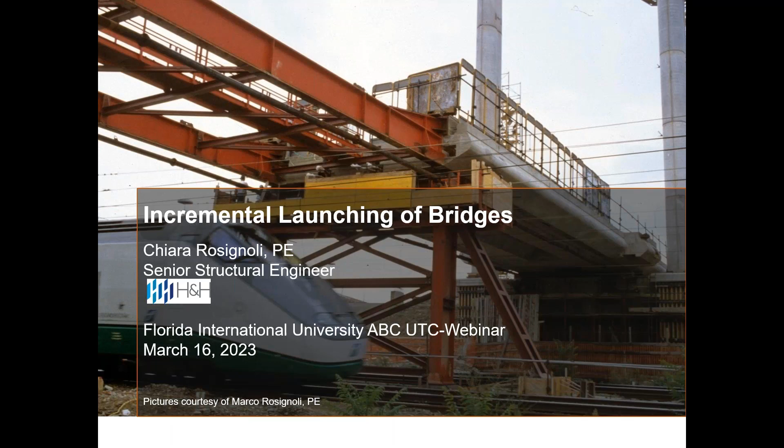Today we will talk about incremental launching of bridges. We will discuss what this construction technique is. We will focus on incremental launching of cast-in-place concrete bridges. We will then compare this construction technique with other construction techniques suitable for similar span lengths. We will take a look at some limitations of the application of incremental launching, and then some examples of application, including some very unique bridges.

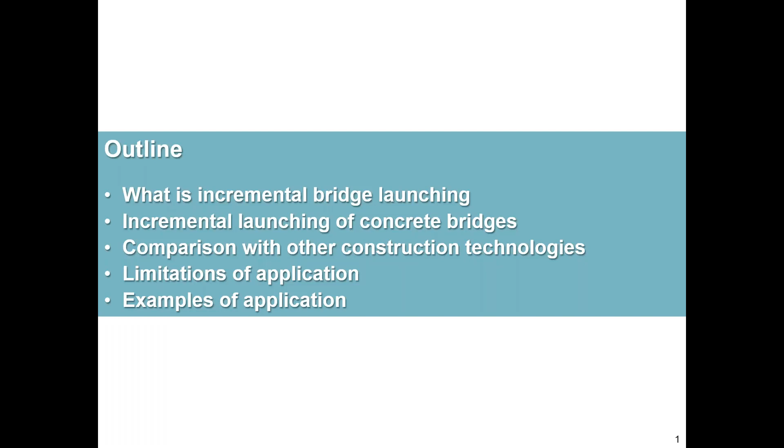Incremental launching was born in Europe in the 60s, but it became way more popular with the advancement in knowledge of materials. Especially the introduction of Teflon was a game changer for this construction technique, because it ended up replacing elements that were greased with motor oil, making sliding bridges way easier. This construction technique is now widely used all over the world, including in the US. Two memorable bridges: for steel bridges, the approach span of the new New York bridge, with some very interesting videos online of this launch; and for post-tensioned concrete bridges, the Belleair Causeway, built in Florida.

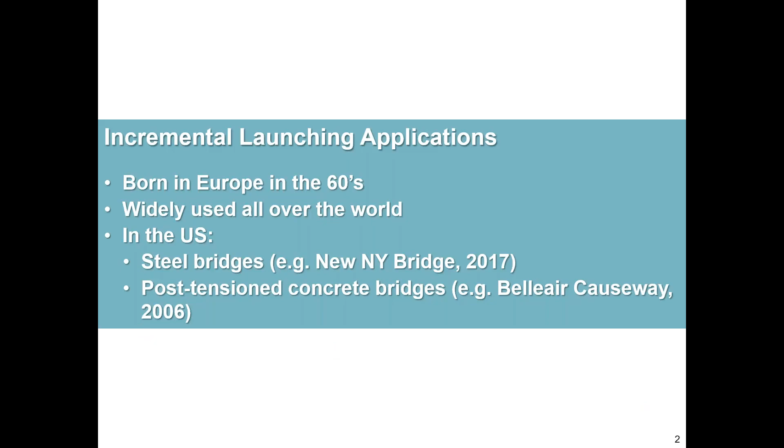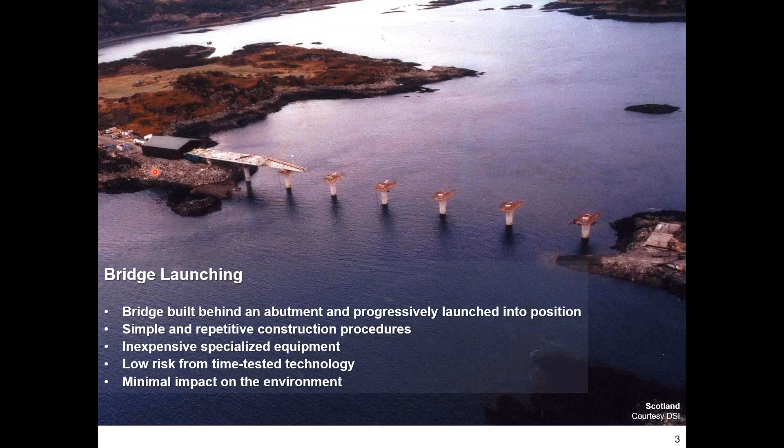So we're looking at a launching nose. Here you can have a better idea of how it's made. It's, as we said, basically two beams attaching the front part of our bridge that are braced together.

We saw before the bridge is built in a fixed facility, so it is sheltered from the elements, but at the same time the area around the construction area is sheltered, so it is environmentally friendlier than other construction techniques. With this construction technique it's usually easy to use local labor and material in support of the local economy, because even if the local crew may not have long experience with this technique, it is very repetitive, so the learning curve is fairly quick.

Now you're looking at a beautiful bridge that was built in Scotland in 2008. For this bridge, the environmental impact was a major concern during construction, since it was built in an estuary, and that is one of the reasons why incremental launching was chosen as a construction method. You can see there's no impact on the estuary.

For this bridge there was another big concern: this area is in the migration path of some bird species, and there was environmental concern about not disrupting this process. That's why they wrapped in green fabric all the areas where the workers were passing by.

Incremental launching does have a minimal impact on active infrastructure. You can see down here, this bridge was launched over 11 active railway lines, and it was constructed in this area in 3 sections.

It was then pushed in 3 pushes, so there was no active work over traffic. There were no speed restrictions on traffic, and the railroads underneath remained electrified. So this construction method does have a minimal impact on maintenance of traffic compared to other construction techniques.

So we said we were going to focus on cast-in-place concrete bridges. Let's see how we actually build a cast-in-place concrete bridge that will be incrementally launched. First, we build our foundations and piers and place the launching bearings.

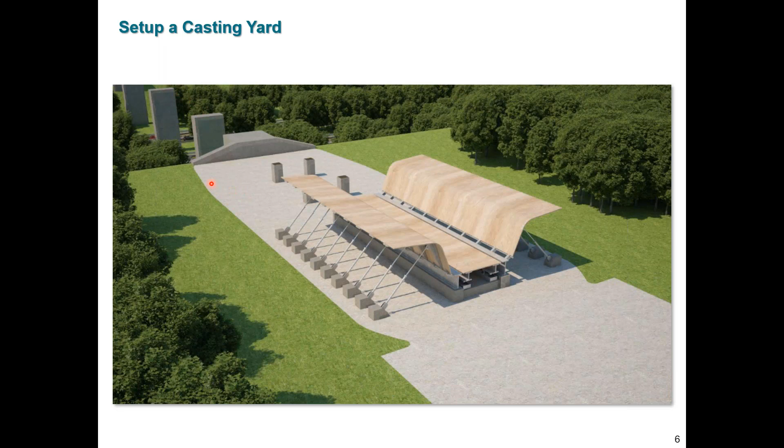While we do that, we start setting up our casting yard. Our casting yard will have a launch abutment, the curing supports, and a formwork made by a soffit form, the outer forms, and the extraction rails, one per side.

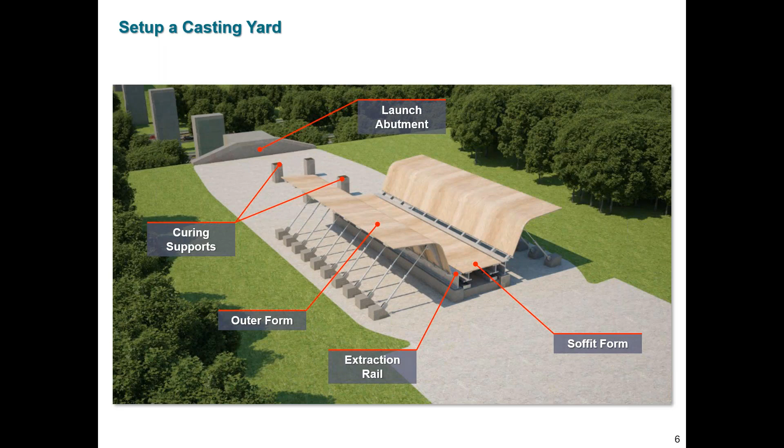Then we place the launching nose on the curing area, and we make sure the back part of the launching nose is in contact with the front part of the first segment. It will not just be in contact, it will be securely tied to it.

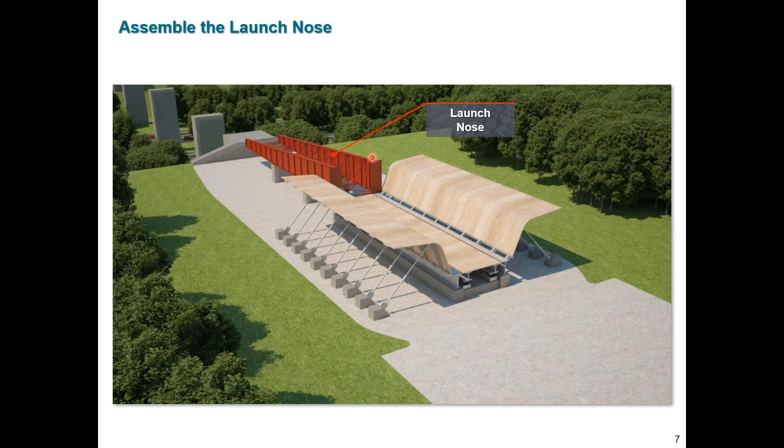Then we set the rebar cage and cast the segment. Once the segment is ready to be taken out of the formwork, we open the outer forms, as you can see here. We lower the soffit form, so now the deck is bearing on the extraction rails.

There are several ways to push ahead these bridges. Today we will focus on one of the simpler applications, which is what you see in this rendering. So there are draw cables, these yellow lines anchored to the launch abutment, which attach to these jacks.

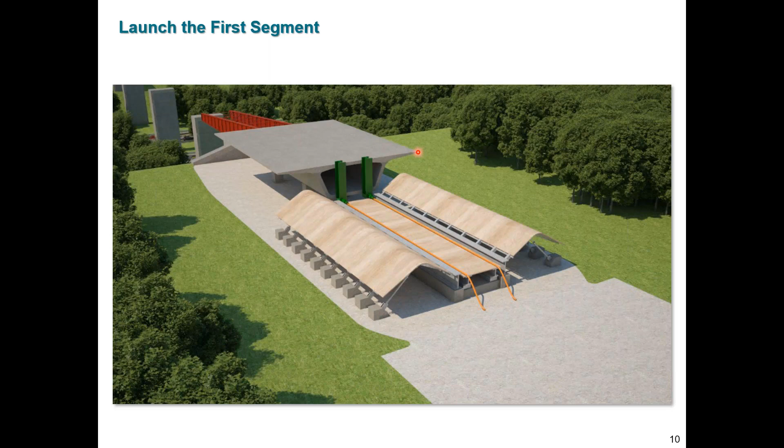And then we have the back thrust beams. So these jacks go ahead and push ahead the first segment, freeing the formwork for the second segment. The second segment will be cast against the first segment, and the construction joint will have through reinforcement, so it is a fairly solid construction joint.

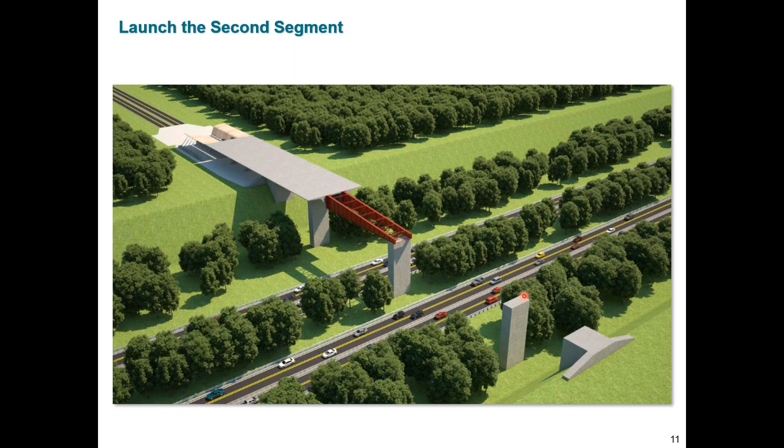This is how the first segment is pushed ahead, and the second segment too. In the previous slide, you saw how the launching nose first was overhanging outside of the abutment. A few segments after, it is bearing on the second pier, and this is done to reduce the weight of the cantilever of the deck. A few segments after, the launching nose will reach the last pier, and then we will have bridge completion.

So we just saw a simplified rendering of how a cast-in-place bridge is built with incremental launching. Let's see a real-life application.

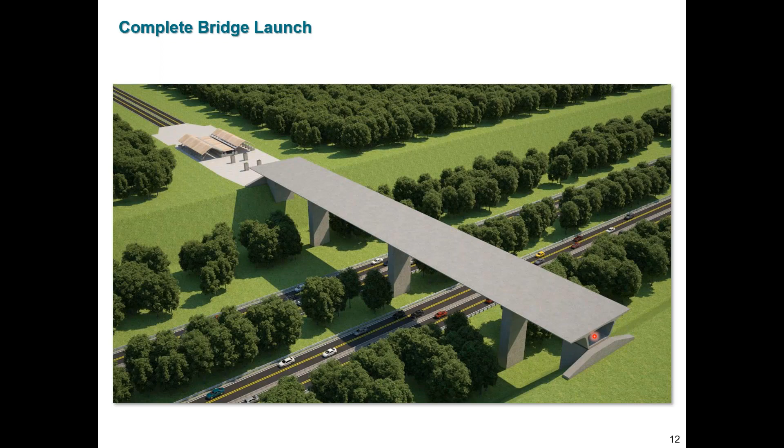This bridge was built in Milan, Italy. As probably most of you know, it is a very densely populated area where disruption of traffic is a serious issue. So you can see here the traffic going on while they were setting up the casting yard. This is a real-life application of what we just saw in the rendering, so we have the launch abutment, the curing support, and then our formwork.

We want to have, in terms of room behind the abutment, at least one span length. This is to avoid problems with overturning. It has also been done with shorter room behind the abutment, but there are some challenges that need to be overcome. So if we want ideal situations, we want at least one span length behind the abutment.

In the second picture, you can see how they placed the launching nose. It was bearing on the curing supports, as we saw in the rendering. At the same time, the crews were working on the formwork. You can see how the trucks used for launching this bridge, for putting together the segments, are fairly average trucks. There is no special heavy equipment involved with this construction technique.

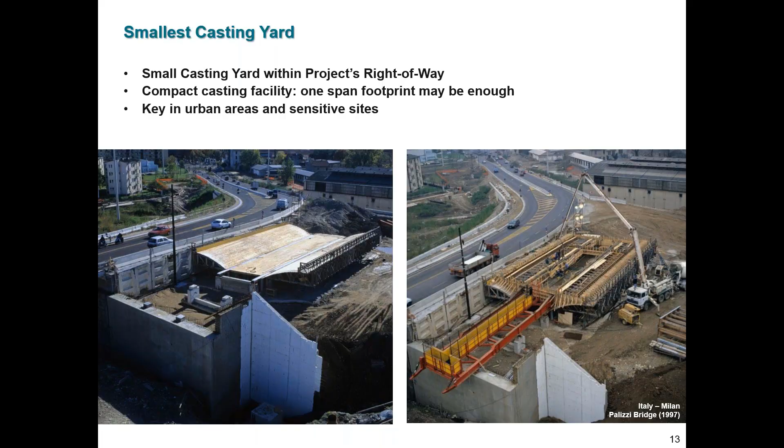In this last picture, you can see the launching nose now. You cannot see it from the picture, but it's bearing on the first pier. The first segment is part on the curing area and part overhanging. The formwork is ready for the second segment with through reinforcement. You can barely see through the barricade, but workers are getting the cage ready for the second segment, and they're also working on the deck.

You can see how the barriers are already in place. So at launch completion, the work that needs to be done on the deck is minimal. The bridge is pretty much ready to go. That's also part of the reason why this is an ABC application. When we are done launching, the bridge is good to go.

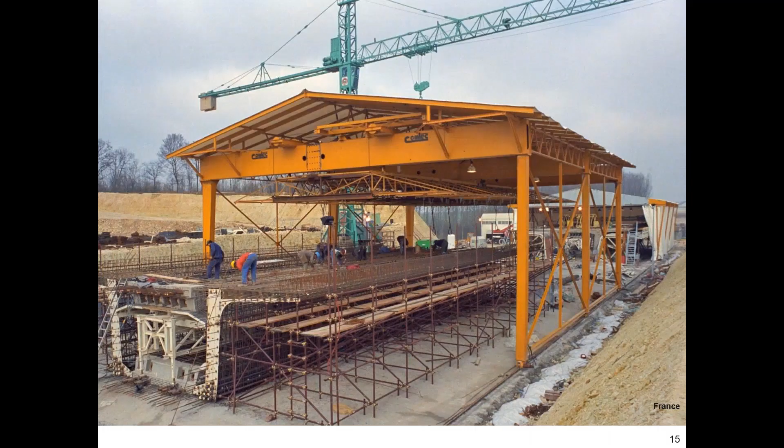The example we just saw was a fairly simple application. For this construction method, the length of the bridge governs the industrialization. We need to find the balance between the equipment we want to use and the labor investment we want to have. This bridge was built in France, and it was a much longer bridge than what we saw before, so they invested in more equipment.

You can see here in the back, the first segment curing. At the same time, they had more room behind the abutment, so they were also able to have workers setting up the rebar cage while the first segment was curing, so that once the first segment was pushed outside of the formwork, the rebar cage was ready to be moved into the formwork.

As you can see, there is no aerial construction, which is safer for the workers. Typically people are more comfortable when they work on the ground, and when we are more comfortable, we are more accurate, and we're also faster.

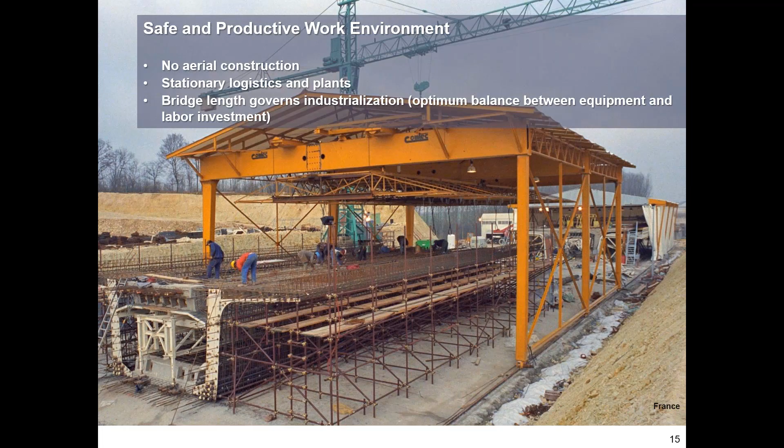We said we were going to look at some limitations of application. For applying incremental launching to bridges, we need some geometry requirements. First of all, we need constant depth bridges, just because of the nature of this construction method. We cannot go up and down following a variable depth bridge during launch.

The span length of the bridges can vary from 350 to 5,000 feet. When we work with longer bridges, we can launch from both abutments. This has several advantages: it is faster, because we are working from both sides, and it also reduces the weight of the structure that is pushed forward. So all the maneuvers are much simpler.

Concrete girders have an optimal span range from 65 to 230 feet. For steel girders, we can achieve longer spans, talking about 160 to 550 feet. We can achieve longer spans with steel girders because they're lighter structures, so launching is easier for some aspects.

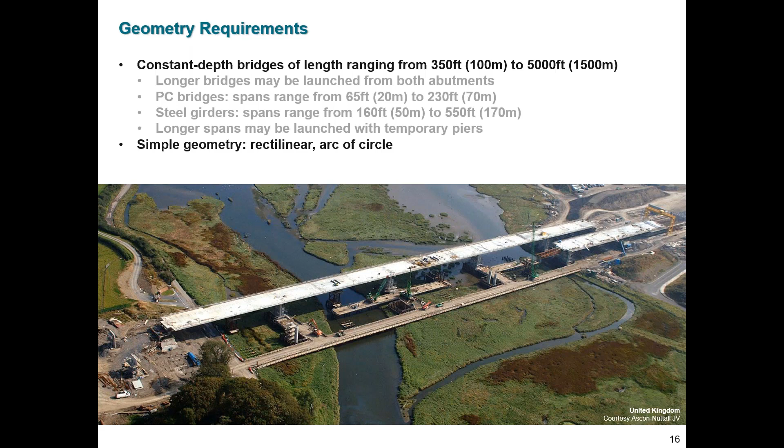There are some design challenges, mostly because of the variation of the static system during launch. During incremental launching, every cross-section is a support section and then a midspan section. If we look at the section that is now here, before it passed through the pier, it was a support section, so it saw some tension in the top and some compression in the bottom. Before that, it was a midspan section, so it saw compression in the top and tension in the bottom.

These translate into more material. We are talking about 5 to 10% more post-tensioning and reinforcing than bridges cast on false work for concrete bridges. And for steel bridges, we are talking about a 7% increase in steel weight for the additional bracing and also the thicker plates that are needed.

So where is the cost saving? The cost saving is on labor and equipment. And we all know the cost of labor is increasing higher and higher. Launch stresses, they need to be corrected in most cases.

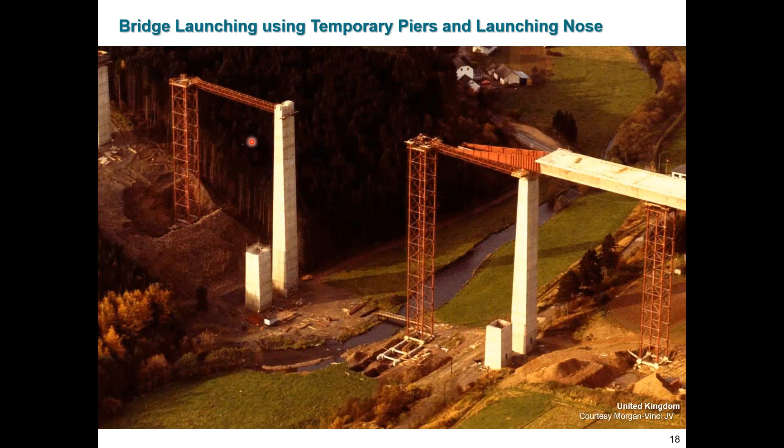So the advantages of incremental launching is that we don't have construction operation under the bridge, and we minimize all the aerial construction. For steel girders, based on the weight of the structure and the span length, we may or may not use a launching nose. In this case, they did it. You can see it here.

Also, we talked about the geometry. We already saw an incrementally launched bridge that was completely rectilinear. This bridge is on an arc of a curve, of a circle. You can see how also the launching area behind the abutment is set on the same curve. For steel bridges, at bridge completion, we can just launch precast panels on top of it, and that makes it an easy application.

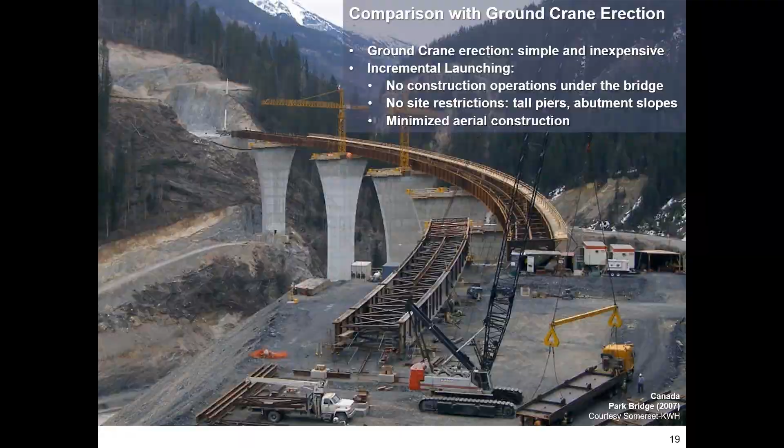So let's compare incremental launching with precast segmental construction. You see an example of precast segmental construction. Precast segmental construction is faster. If we take, for example, a span that is, say, 160 feet long, that can be built in 2-3 days with precast segment. It will take about 2 weeks for incremental launching of cast-in-place segment. This is just because of the casting of the segment. The launch itself doesn't take a long time.

On the other hand, incremental launching is a much lower investment. You can see the equipment that is needed to work with precast segmental construction. Also, for precast segmental construction, we know that the weak parts of the bridges are joints. With incremental launching, we typically have only two joints, and they are at span quarters, so they are close to points of contra-flexure, so they have less demand.

Going back to our example of a span that is 160 feet long, for precast segments we'll probably have about 16 joints, 16 segments. So we don't have epoxy in the joints. We have through reinforcement, and this is in favor of uniform flexural capacity. There is also no impact on the ground.

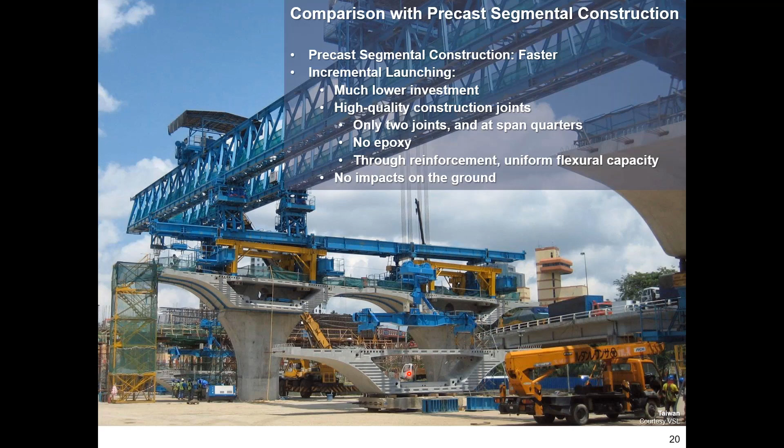Here you can see how when we work with precast segments, we need room to cast the segments, and we also need room to maneuver the segments, and we need heavy equipment to move the segments from the precasting yard to the area of construction.

Let's compare this construction method with movable scaffolding system. Movable scaffolding system is adaptable to irregular bridge geometry. Incremental launching can handle some variations in the geometry, but it really works better with simple geometries. On the other hand, incremental launching is less expensive, especially when we consider mobilization or demobilization.

In this picture, you can see an example of MSS. It is a less labor-intensive production, and with incremental launching we have stationary logistics. There is no aerial work, and also there is no need for extra clearance under the bridge.

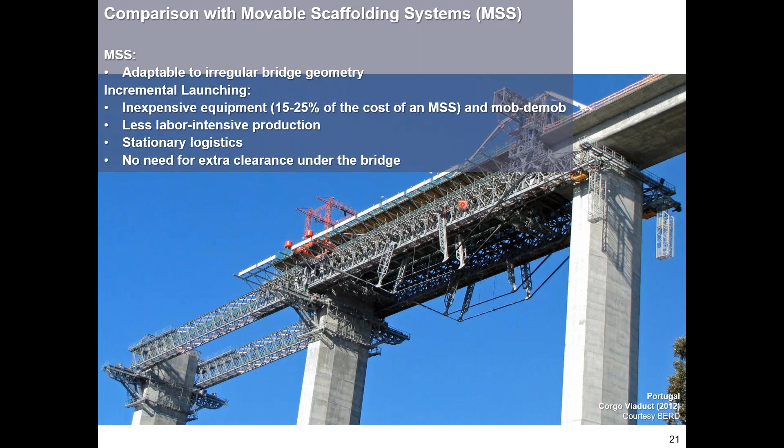If you look at this picture, you can see here is the bottom of the superstructure, and all this extra clearance is needed just for the MSS itself. Sometimes in urban areas we don't have the luxury of having such a large clearance. We are pretty tight, so in that case incremental launching presents some good benefits.

So how do we push ahead these bridges? There are several technologies. As we said before, today we will focus on one of the simpler applications, which is the use of prestressing jacks.

In this picture you can see basically what you saw in the initial rendering. We have the thrust beams, we have the prestressing jacks, and we have the draw cables that are anchored to the launch abutment back here.

This means that we have a short stroke, so typically we use two jacks. One is pushing and the other is recovering. Once the first one is done pushing, the second one is ready to push, and so on until completion. You also see two very important elements here, which are the guide beams. We do need guide beams to make sure that during launch there is no lateral drifting and we keep the bridge in alignment.

Other ways of incremental launching bridges are rear thrust hydraulic cylinders and reaction beams, which will be a long stroke, or friction launchers. They're both very interesting technologies, although we will have to brush through them today for sake of time.

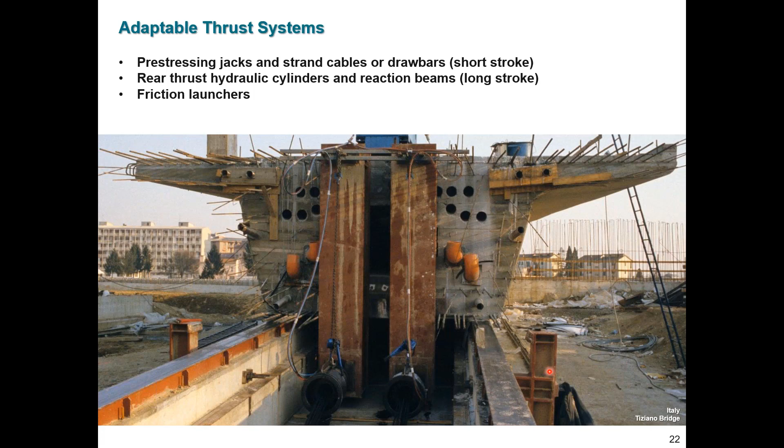When we launch a simple span over a highway crossing, we could use an SPMT, and this is what they did in Belgium in this picture. SPMTs are great machines, although they do disrupt local traffic, and also they need a fairly flat surface or a regular surface to run.

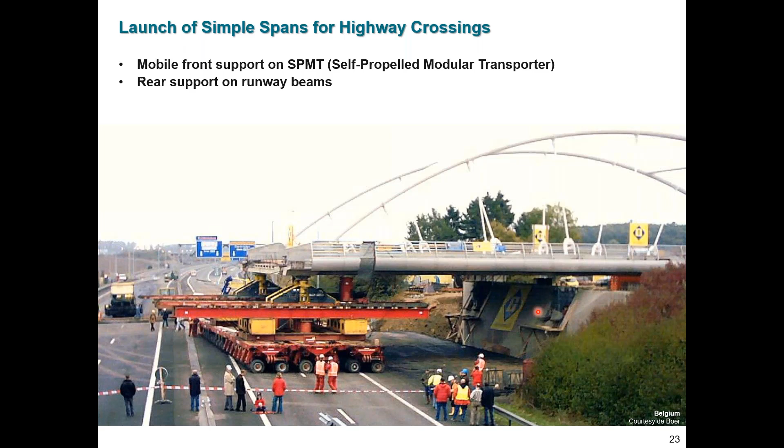In this case, we were over a railroad, so the surface was definitely not regular, and the catenary was still electrified, so SPMT would not have been a good option. The bridge is an application of ABC. It was fully built behind the abutment and then launched in only one night. This was done in Italy, in Reggiolo, very close to where I used to live, and I was present during the launch. This bridge presents a few unique elements, so let's look at them.

It's a 4-cell box girder with a variable width. So the beams that are typically used for preventing lateral drift, the guide beams that we saw before, were not applicable for this bridge. Instead, they embedded a rail, and you can see it here in the middle of the bridge, into the deck.

During launch, the deck was supported under the interior webs of the box girder, not the exterior. Before, until now, we only saw steel launching noses, and those are a more common application. In this case, they adopted a short concrete launching nose, which is basically just an extension of the interior webs that was post-tensioned.

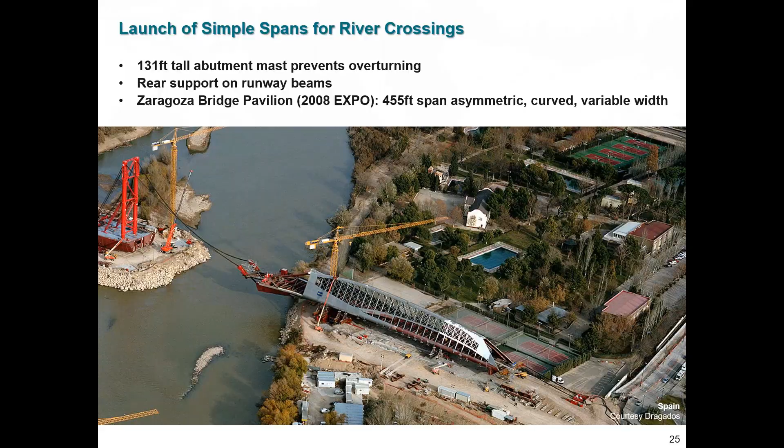So steel bridges are launched as continuous girders, but typically in our final condition, we don't want to have a steel girder that is this long. So we need to account for this during the design phase. We need to make sure we have a splice over the piers where we want to have expansion joints. This way, the bridge will be launched as a continuous beam, but then at launch completion, we can go back and unbolt those splices over the piers where we want the expansion joints.

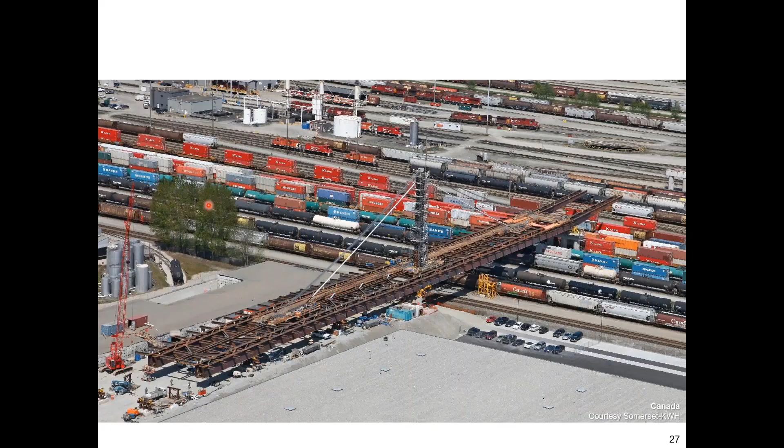So low-level cable stay bridges can also be incrementally launched. Compared to balanced cantilever erection, it is a faster technology and less invasive. We work behind the abutment, set up our structure, and then start pushing. In this case, the leading pylon was supporting the front cantilever during launch, and it was also helped by these two launching noses. This bridge was built in Canada, and it was opened in 2010.

And the other pylons were laying on the bridge during launch, and then they were consecutively erected before opening of the bridge.

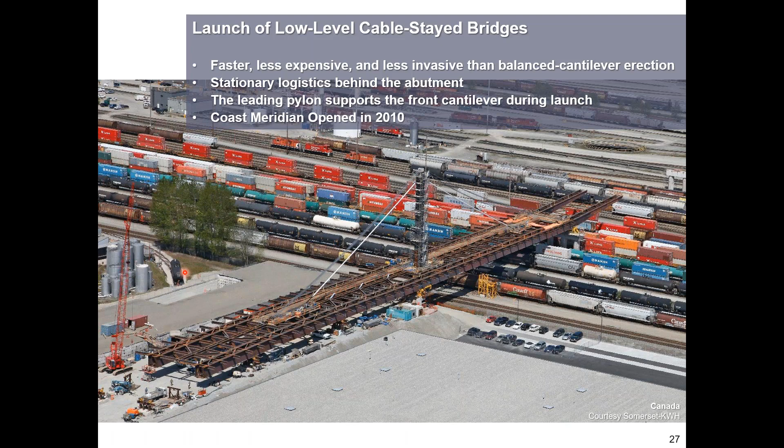So the advantages for high-level cable stay bridges is that the deck that is launched establishes a working platform for cable fabrication. It also makes it easy to access and deliver material through the deck. It's also easier to control the deck geometry, and there are fewer cable tension operations.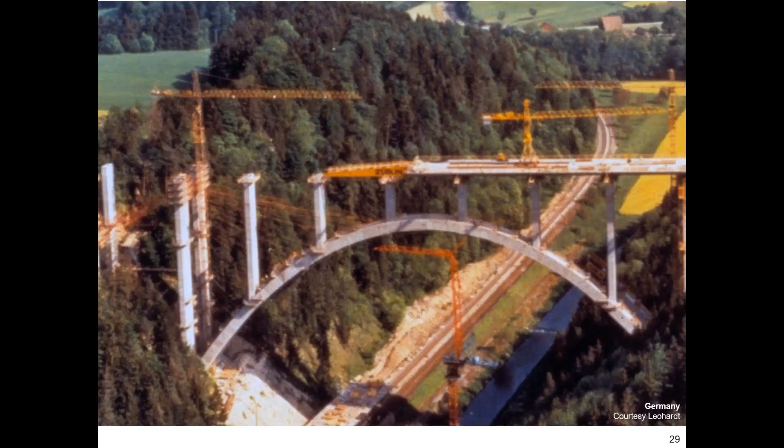Incremental launching has been applied for construction of arch bridges. The lower part of the arch is typically constructed in a more traditional way, and then the deck is launched into position. This is an older bridge, built in 1978 in Germany. There are several applications around the world of this same technique.

So what are the advantages? We have longer approach spans compared to other construction techniques, so less piers, less foundations, less cost. We have a lower load imbalance on the arch, and we also only have one learning curve for both the main span and the approaches, because as we said, these sections are always the same.

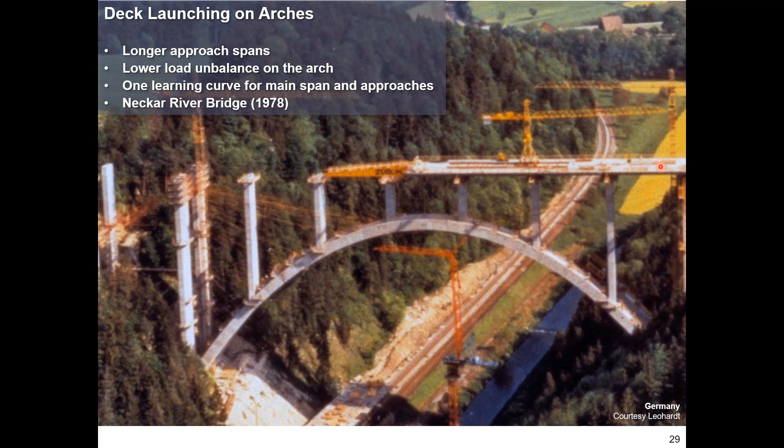And you can also see here how they use a launching nose that was bearing on two of the verticals of the arch, and the crane that was used for operation on the deck during launch.

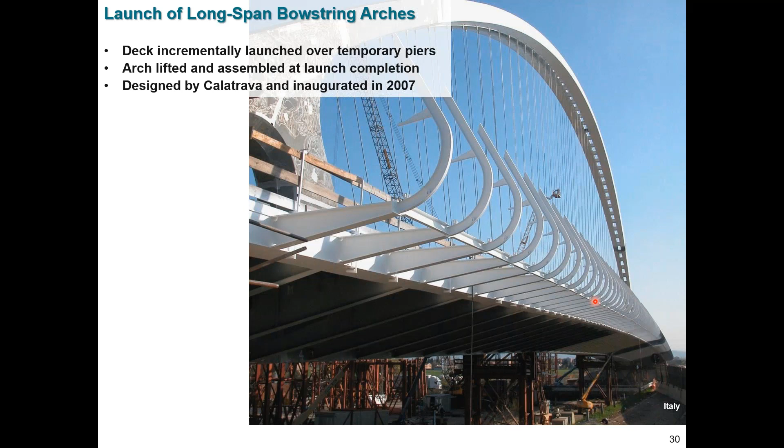Incremental launching has been used for long span bowstring arches. This bridge is a Calatrava bridge built in Reggio Emilia in 2007, a 30-minute drive from the town where I grew up. It's a beautiful bridge, and it was incrementally launched by launching the continuous span over temporary piers, shown here. During incremental launching, the arch was lying on top of the bridge. At launch completion, they assembled and erected the arch. When the arch was ready, they removed the temporary piers, and that was it. This bridge is also built on one of the oldest highways in Europe.

Incremental launching has been used in conjunction with bridge skidding for replacement of bridges. You can see on the left-hand side the bridge that needs to be replaced, and on the right-hand side the new bridge. These new decks were built behind the abutment, then launched and skid on the side, repeatedly. After the segments are completed behind the abutment, the launch itself is a fairly simple and quick operation. That's why we're talking about ABC.

If you look at these decks, they're completed - you can see rails and railing already in place. So at launch completion of the new deck, the old deck was skid off of alignment, and the new deck was skid into position.

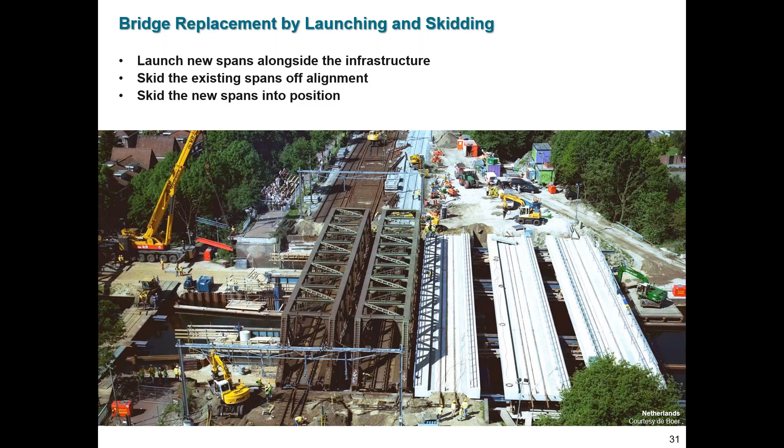Incremental launching has also been used for bridge demolition. This picture was taken in France, and it shows how the old bridge that needs to be demolished was jacked up to make room for incremental launching on an underbridge. The underbridge is this blue beam, now in launching phase, but the end of the launching phase will be at the end of the bridge. The bridge was then released onto the underbridge, and then skidded along the underbridge for incremental demolition behind the abutment, which is here.

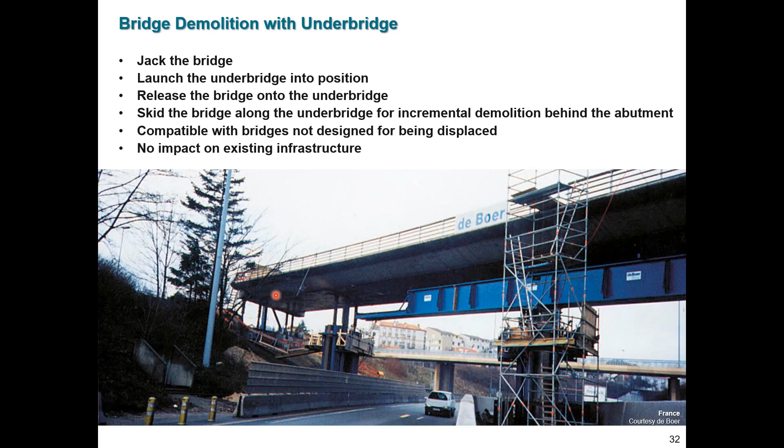I don't have a full picture that shows the whole process, but in this way, the area of demolition was contained, and as a consequence, the impact on the surrounding environment was also contained. This type of demolition has a minimum impact on surrounding infrastructure and on traffic - you can see a car driving under the bridge during these operations.

So what are the optimum conditions for bridge launching? Bridge launching is great when we need minimal impact crossing, where there is active infrastructure or sensitive areas, or areas where the impact on the environment is a real concern - urban bridges where clearance under the bridge is tight. It works very well with medium-length bridges with simple geometry. It can be adapted to more complicated geometry, but this application is at its best when we work with simple geometry.

This construction technique has also been applied to cable stay and arch bridges where the area can be partially disrupted, or when we work aerially at very tall elevation. In this picture you can see the launching nose, the deck how it was completed, with railings and sound barriers during the launch. You can also see the temporary piers, which were anchored to both abutments with stay cables encased in steel tubes, to avoid the risk of a broken strand falling on the catenary, since these catenaries were still fully energized.

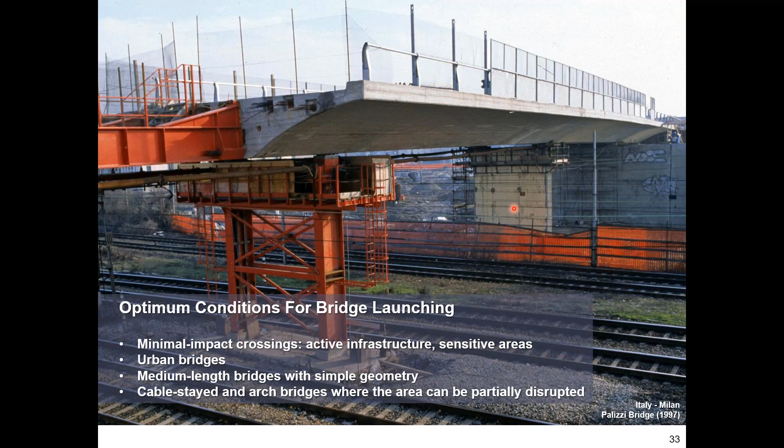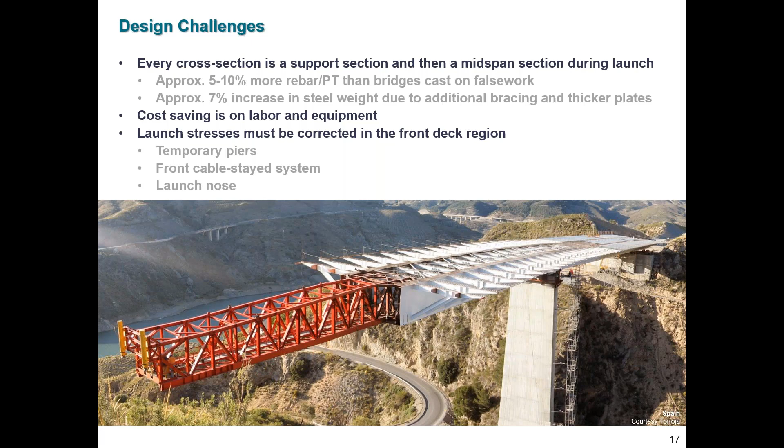Along the same lines, what's the overall maximum weight of a typical incremental launch? I think that varies too. Although if the bridge is long and we have room behind both abutments, when the bridge gets very long it gets heavy, so we can launch from both abutments. That reduces the weight of the bridge that is moved. But again, it's a balance between span length, the equipment we have, and the section we also need for final design - there's not just the launching stresses.

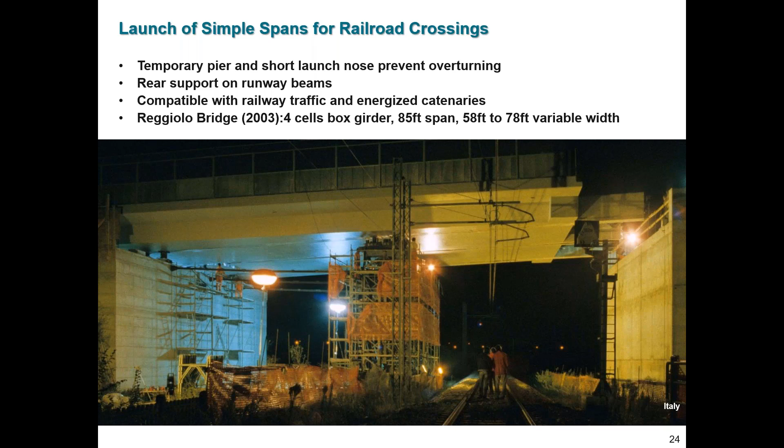A question came in beforehand: for this technology, what is the effectiveness of using fiber reinforced concrete for bridge deck slabs? Going back to the precast panels, it's pretty much the same advantages we have for regular steel bridges because we put the precast panels at launch completion. So during launch, we only launch the girders - we don't have any deck on top of it. After that, the advantages or disadvantages of fiber reinforced concrete are the same as we see for more traditional construction types.

A question came in about bearings - what type of bearing pads or sliding elements are typically used during bridge launching activities? Launching bearings are very interesting - we should probably have a presentation just on launching bearings and the thrust system. I'll try to keep it short. We need different launching bearings whether we're working with a concrete section or steel girders or steel U girders, because of the different weight of the structure we're moving and the flexibility of the section. For concrete, we have the simplest application - typically a launching bearing for a concrete bridge looks like a sandwich: a concrete block, then an elastomer, then a plate that's either steel or concrete, then a layer of polished stainless steel and neoprene pads, and then the deck on top. The weight of the deck moves the neoprene pads on top of the layer of polished steel through friction, and that's how we incrementally launch concrete decks.

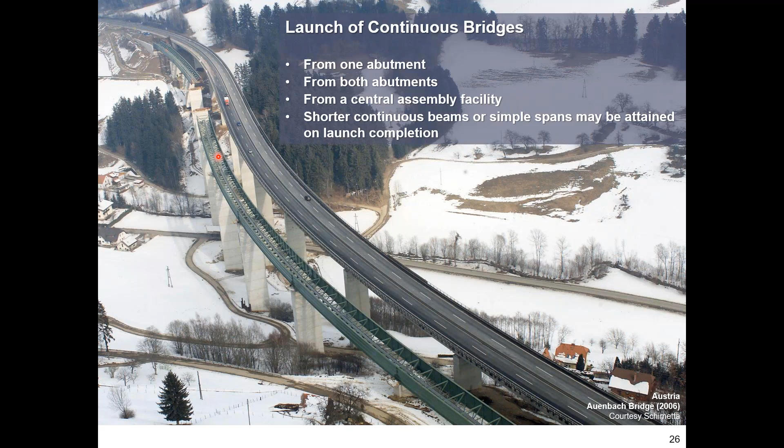Okay, we've answered all the questions that came in beforehand, and I'm going to go down some that have come in during the presentation. These are pretty good. For slide 5, this question came up several times: was launching permitted with any live load traffic down below? You did mention one where that was going on.

So is that common, or just during the actual launching operation? It really depends. It has been done - you've seen applications where launching was done on active traffic, with no concerns from the local jurisdiction. In other cases, it was preferred to stop traffic during the launch operations and then restore it. When we talk about launching operations, we're talking about hours. So even if a bridge was built in 3 segments, they will stop traffic during the launch.

They will launch a segment. During the launch, they will stop traffic. While they're building the second segment, traffic will be ongoing. Then they will stop traffic for a few hours and launch the second part. So now we have the bridge up to here, and traffic will be going while they're building behind the abutment, then they will go to completion without traffic underneath, and then reopen the traffic. Now, is this necessary? No, it has been done both ways. It really depends on the level of comfort that we have.

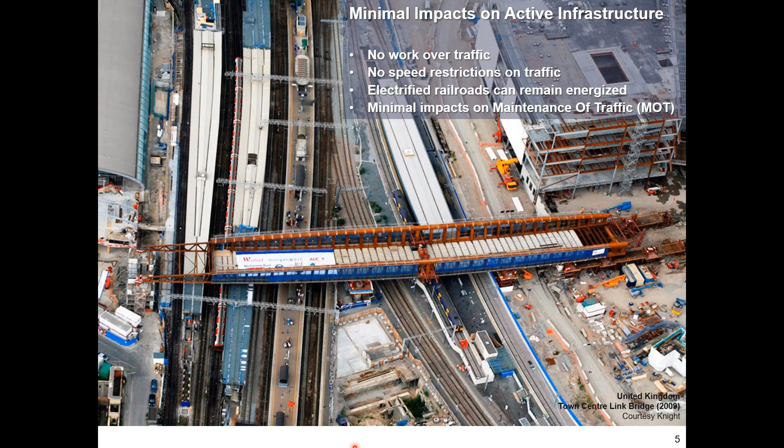Okay, a couple questions here. For the segments, is it required to coat the soffit forms with some sort of grease or other bond breaker? When we extract the segment, we are just bearing on the extraction rails, which are treated to make sliding easier. The lower part of the form is lowered, so the deck is just bearing on the extraction rails.

On the extraction rails, after casting a segment and lowering the bottom soffit forms, is the just-cast segment supported continuously on the rails or at discrete points? It depends, it can be done both ways. In this picture, you can see it is continuously supported. Sometimes we use launch bearings. There are several options - this construction technique has been used all over, and it is very flexible.

Some of the launching equipment is dictated by preferences, other times by what is available. So incremental launching has been applied with a good variety of different technologies.

Does the length of the nose - excuse me, is the length of the launching nose set based on span length, or is there a specific length for the nose, and then the span length is adjusted accordingly to match?

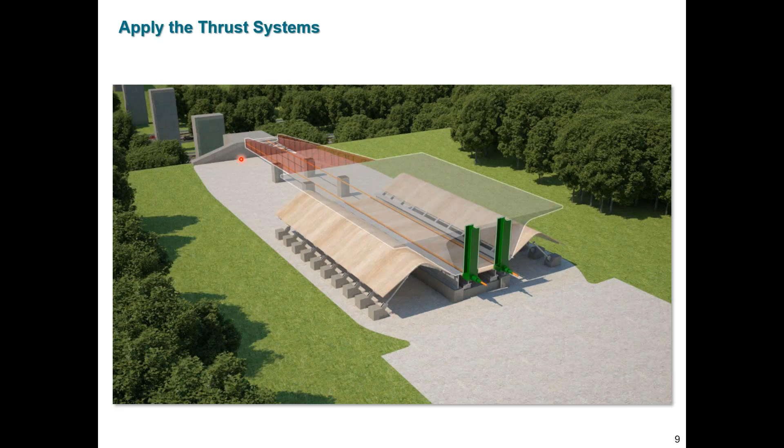Okay, there was a question about slide 28. This is, I think, the Millau Viaduct, the high-level cable-stayed bridge. You said in the photo it looked wavy - is that a photographic effect, or was it really wavy during the launching? Yes, it is a photographic effect.

We mentioned before that when we launch, the cross section stays constant, because since we're sliding this section, we can't really work with the ups and downs that we will see, say, in a balanced cantilever. We just can't accommodate the ups and downs.

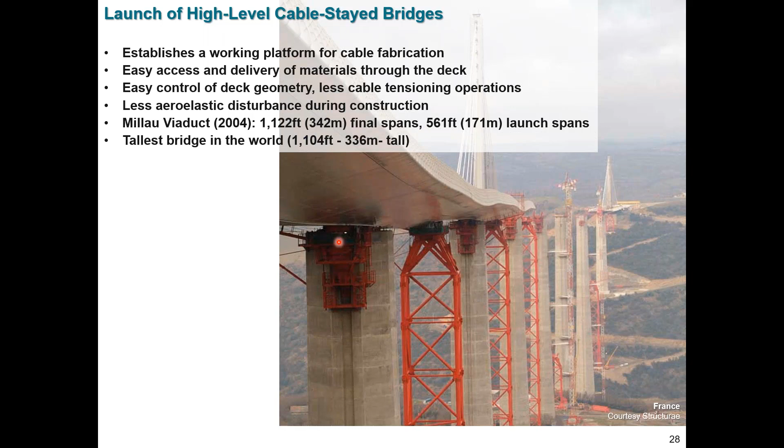I'm going to turn it over to Jugash, and he's going to ask a few more questions. Thank you, Paul. Chiara, the first question I have is, why was the launching technique preferable over a launching gantry crane for the bridge in Scotland? We're talking about this bridge, correct?

So I assume, yes, in this case, incremental launching was preferred to other construction techniques because of the smaller environmental impact. As I said, it was a very sensitive area from an environmental standpoint. There was a major concern in not disrupting the environment, both in water and outside of the water, and on top of it, also the migratory movement of the birds. So most other construction techniques would have had either more impact in the water, or the construction of the deck itself would have been more invasive. So this was considered in the design phase. Actually, this bridge is the winner of a Saltire Engineering Award.

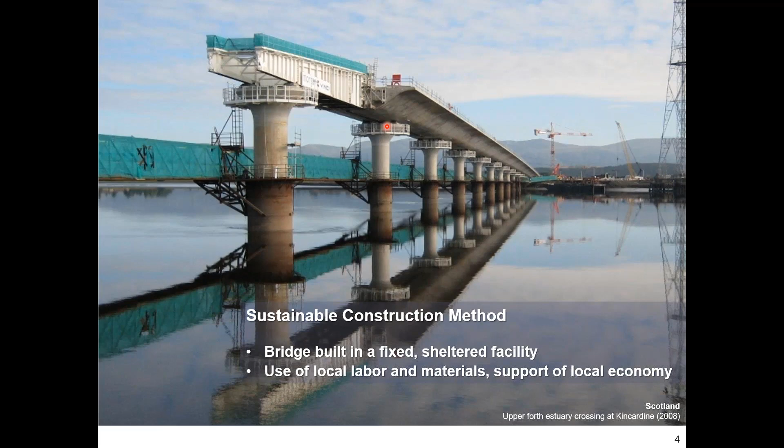Okay, thank you. Next question. For forming segments, is it required to coat the soffit forms with some kind of grease or other bond breaker? I think we already addressed a similar question when we were talking about the extraction rails, but if whoever asked the question needs more information, feel free to reach out and we can talk about it.

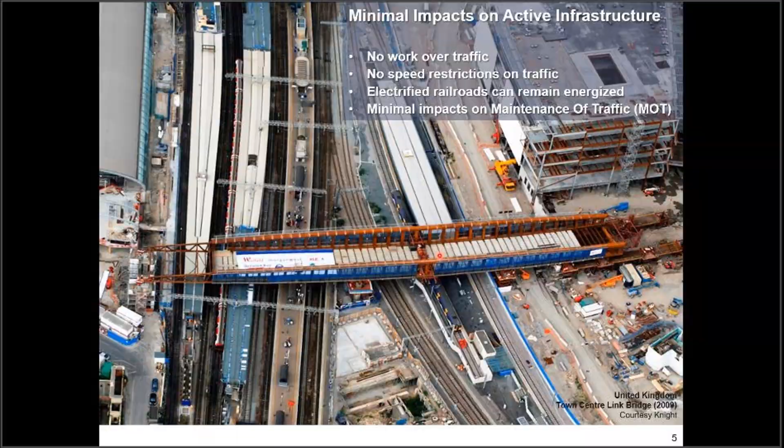Next question: after casting a segment and lowering the bottom soffit forms, is the just-cast segment supported continuously on the rails or at discrete points? We already discussed this, but it depends - it can be supported just on... so in this case, once they lowered the soffit form, the deck was continuously supported on the extraction rails, although it can also be supported on launching bearings. It depends - there are several different technologies to push forward these bridges. What we're showing here is one, but several other techniques have been used throughout the years in different countries, depending sometimes on the equipment available on site, the length of the bridge, and also the amount of industrialization that it's worth investing in.

Next question: how is the launching nose attached to the segment, since it appears to require a strong moment-resisting capability? The launching nose is attached either bolted or post-tensioned into the bridge, depending on whether we're attaching to steel bridges or concrete bridges. And it's true, the connection between the launching nose and the front part of the segment needs to be very well secured.